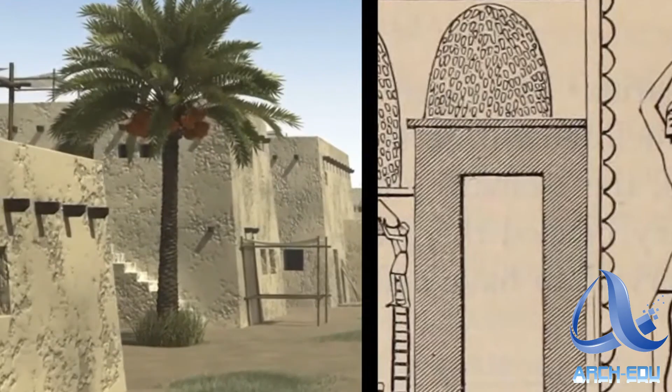The Nile River was the lifeline of ancient Egypt. The civilization rose and fell on its monsoonal tides, which brought rich silts for farming down the river. But this powerful waterway was known to rise too high for the Egyptian people 7,000 years ago. To overcome this, they prepared simple walls from reeds, filled with soil and rocks to shore up a failing bank, nudging the flow of the mighty Nile where it would benefit these ancient people the most.

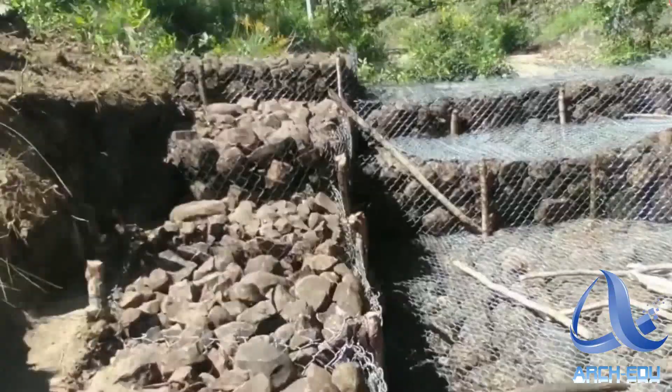The retaining walls date back to ancient Egypt, where they were used to harness the great power of the Nile River. This construction technique used for such walls is called gabion walls. The word comes from the Italian gabbione or big cage, and has its roots in Latin, from the word cavea meaning cage. Gabion blocks are commonly used today when swift construction of earthworks, retaining walls, and even military emplacements are required.

Retaining walls around the world. An ancient community in modern Ireland, Newgrange, Cairn also used retaining walls 5,000 years ago. Also in Old Mesopotamia, evidence shows that they were using retention walls to create pyramid-like structures during those periods.

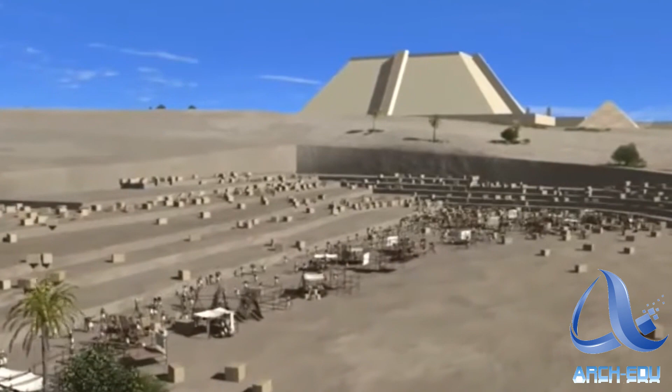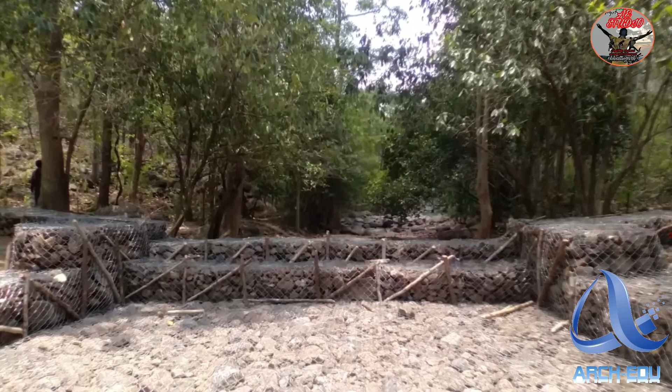The salient factor in making modern steel gabion cages so effective is that they can be collapsed and carried with ease, and once an emplacement is required, they are simply formed into shape and filled with rocks and soil, thus making them an excellent tool for dealing with flash flooding, just as the ancient Egyptians did thousands of years ago. Now let's look at some of the world's greatest retaining walls.

First, Caesar's double walls at the Siege of Alesia were a masterpiece of military engineering. Second, the Berlin Wall. When the Berlin Wall was built in 1961, its construction would physically divide the east and west of the city for the next 28 years. It would become a symbol of the Cold War and heavily influenced German culture for many years to come.

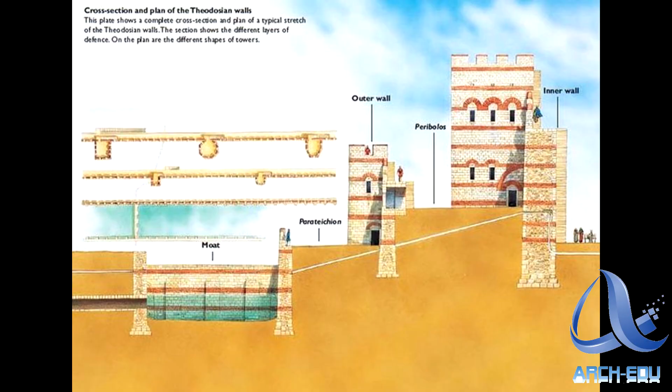Third, the mighty walls of Constantinople. The ancient defensive stone walls of Constantinople, currently known as Istanbul, Turkey, have surrounded and defended the city for over 1,500 years. They were originally built when the city was founded as the new capital of the Roman Empire by Emperor Constantine the Great in 330 AD.

Fourth, the European Wall of China, the Walls of Ston. The Walls of Ston, in Croatia, are some of the longest of any fortress in the world. Construction began in around 1358 and once completed they would stretch for more than 7 kilometers.

Fifth, the Diyarbakir Walls. Built under the reign of Roman Emperor Constantius II in the 3rd-4th century AD, the Diyarbakir fortress is located in Sur, Turkey. The material for the walls came from an older Roman city of Amida and they are the widest and longest defensive walls in the world after the Great Wall of China.

Sixth, Hadrian's Wall. Built to keep tribes of the north out of the Roman province of Britannia, Hadrian's Wall's construction began in 122 AD. The entire fortification ran from the banks of the River Tyne on the North Sea to the Solway Firth on the Irish Sea.

Seventh, the Aurelian Walls. The Aurelian Walls, built between 271 and 275 AD in Rome, superseded the older original 4th century BC Servian Wall. These impressive defensive structures were built to enclose all 7 hills of Rome, Campus Martius, and parts of the Tiber and the Trastevere district.

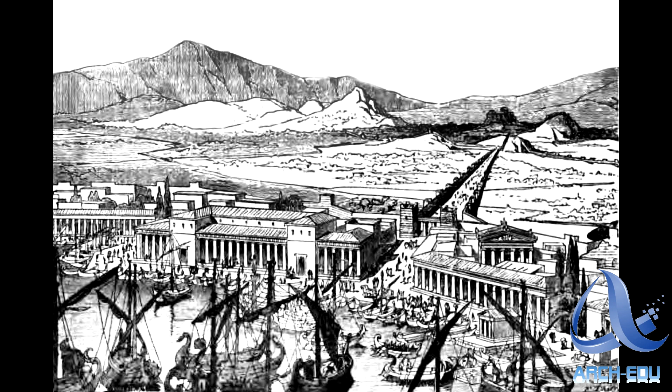Eighth, the Athenian Wall. Stretching over roughly 6 kilometers each, the long walls of Athens protected Athenians' access to their ports of Piraeus and Phalerum during times of siege. They were built over several phases, with the first phase completed in the 5th century BC in response to Xerxes' invasion of 479 BC.

Ninth, the Great Wall of China. One of the medieval wonders of the world, the Great Wall of China runs, roughly, east to west across the historical northern border of China. It officially runs for around 21,196 kilometers or 13,171 miles, with the best preserved and maintained section from the Ming Dynasty extending for just over 8,850 kilometers of that total.

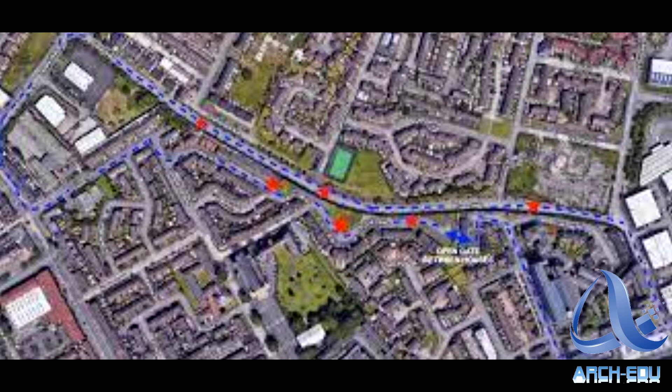Tenth, the Belfast Peace Lines. In an attempt to keep the peace, British officials built a series of separation barriers across Northern Ireland to keep Republican Catholic and Loyalist Unionist Protestant communities apart. The first of these walls was built in 1969, with as many as 59 being built as of 2017.

Eleventh, the Moscow Kremlin Walls. The Moscow Kremlin, simply the Kremlin, is a fortified complex in the heart of the Russian city of Moscow. The original defenses built by Yuri Dolgoruki were destroyed by Mongol Tartar invaders, with the later walls meeting a similar fate in 1365. Stone walls were erected in the 14th century and were later remodeled during the 15th century.

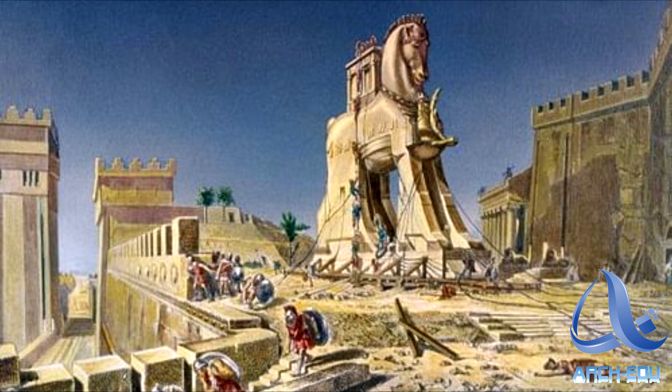Twelfth, the Walls of Troy. The walls surrounded the city and would have been over 5 meters high. The walls were made of limestone and had a series of watchtowers, brick ramparts, or elevated mounds that served as protective barriers. Archaeological evidence suggests the first Trojan walls were erected between 3000 and 2600 BC.

Thirteenth, Fort Kumbhalgarh's walls. Fort Kumbhalgarh is an enormous Mewar fortress situated in the Aravalli Hills in the Rajsamand district of Rajasthan state in western India. It was built during the 15th century by Rana Kumbha, and it was the birthplace of the warrior king of Mewar, Maharana Pratap. The fortress and its walls are built on top of a hill 1,100 meters above sea level. Its frontal walls are as much as 4.5 meters thick with 7 fortified gateways.

14. The Korean Border DMZ. The Korean Demilitarized Zone, DMZ, is a border barrier that divides North from South Korea along the 38th parallel. It was constructed after an agreement between North Korea, China, and the UN in 1953. The barrier stretches for 250 kilometers and is, on average, 4 kilometers wide along the DMZ.

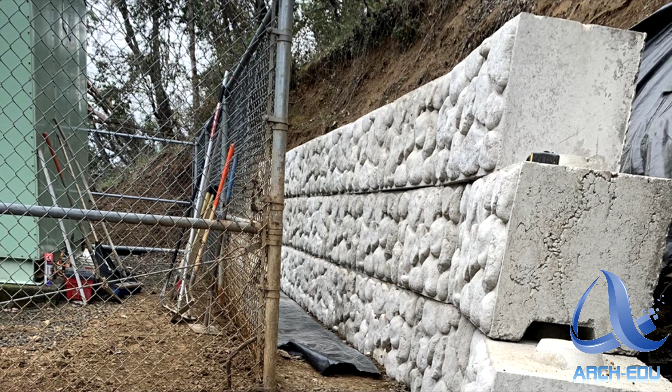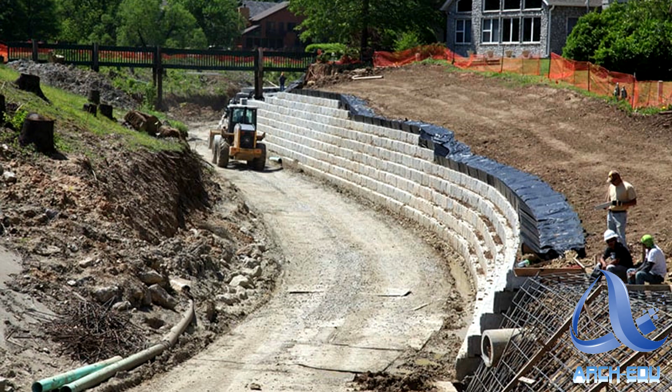Let's take a look at the types of retaining walls. Gravity retaining walls. Gravity retaining wall depends on its own weight only to resist lateral earth pressure. Generally, gravity retaining wall is massive because it requires significant gravity load to counteract horizontal soil pressure. While designing gravity retaining wall, sliding, overturning, and bearing forces shall be taken into consideration. It can be constructed from different materials such as stone, concrete, and masonry units. Crib retaining wall and gabion retaining wall are types of gravity retaining walls, being used more frequently nowadays.

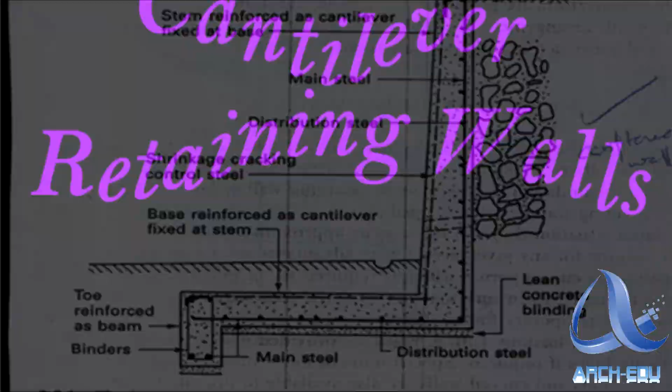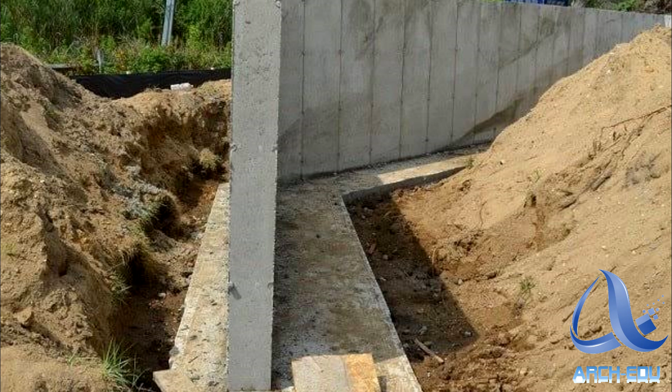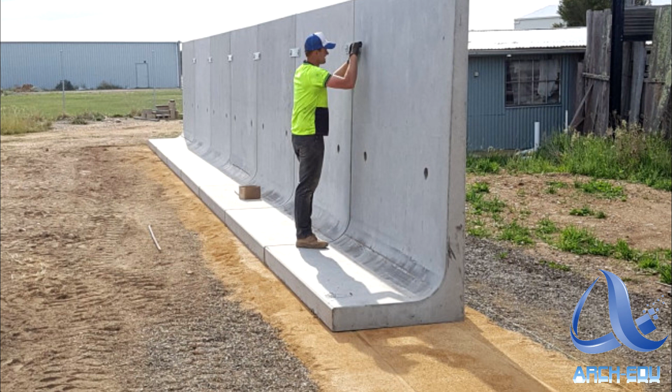Cantilever retaining walls. Cantilever retaining walls are constructed of reinforced concrete. Cantilever retaining wall consists of a relatively thin stem and a base slab. The base is divided into two parts, namely the heel and toe. The heel is the part of the base under the backfill and the toe is the other part of the base. It uses much less concrete than monolithic gravity walls, but requires more design and careful construction. It can be formed on site or precast in a factory.

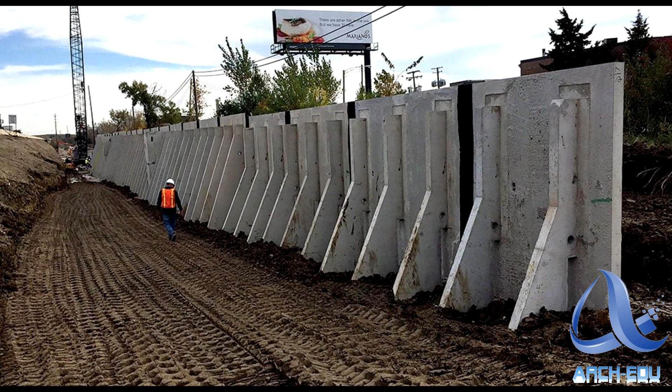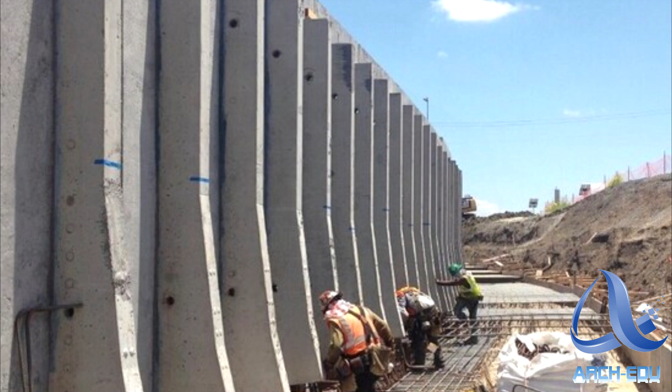Counterfort retaining walls. Counterfort retaining walls are same as cantilever walls, except they have thin vertical concrete webs at regular intervals along the backside of the wall, and these webs are known as counterforts. The counterforts tie the slab and base together, and the purpose of them is to reduce the bending moments and shear forces imposed on the wall by the soil. The secondary effect of these webs is to increase the weight of the wall from the added concrete. It can be precast or formed on site.

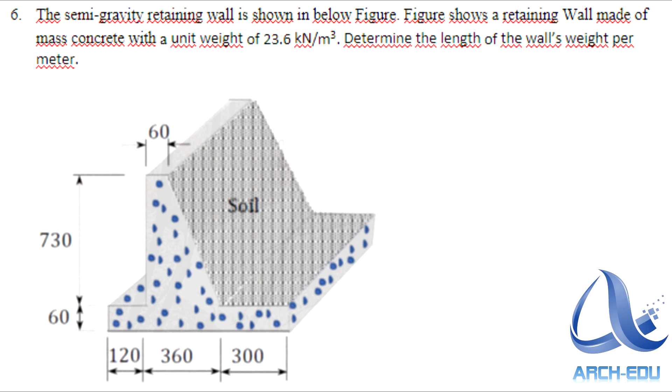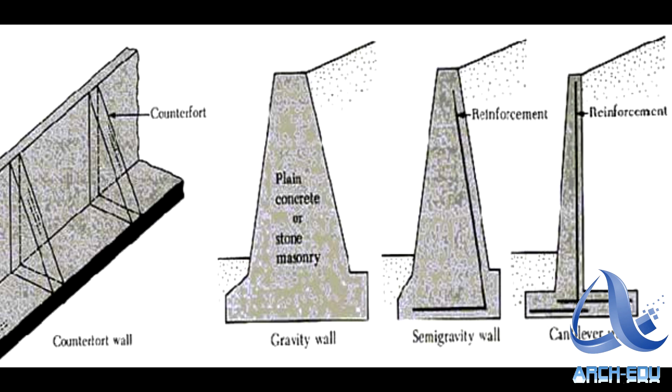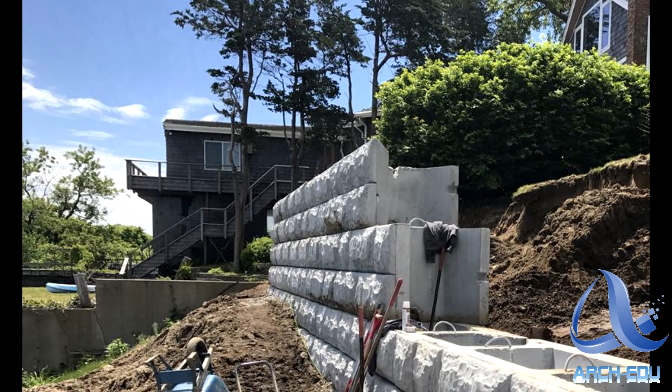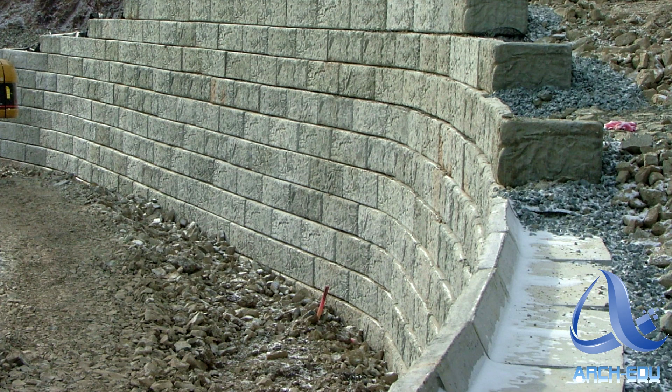Semi-gravity retaining walls. Semi-gravity retaining walls are the specialized form of gravity walls. These types of retaining walls have some tension reinforcing steel included so as to minimize the thickness of the wall without requiring extensive reinforcement. They are a blend of the cantilever wall and gravity wall designs. These walls are often constructed of reinforced concrete, unreinforced concrete, or stone masonry. The rigid gravity walls develop their soil retaining capacity from their dead weights. The semi-gravity walls, such as cast-in-place concrete cantilever walls, develop resistance to overturning and sliding from self-weight and weight of soil above the wall footing.

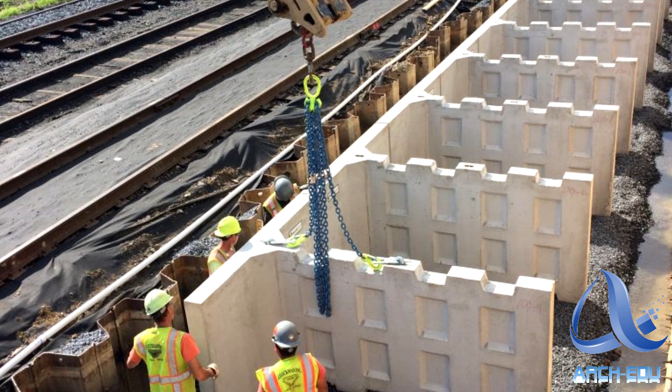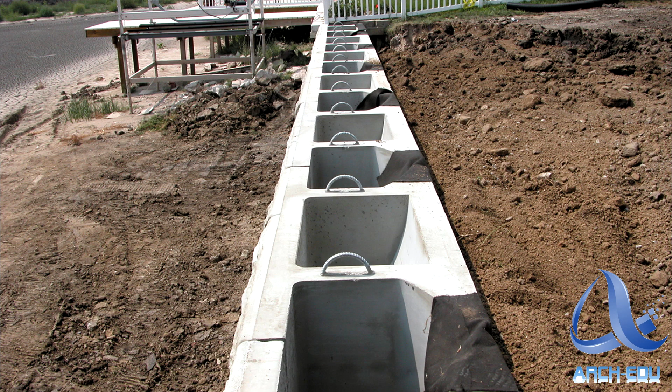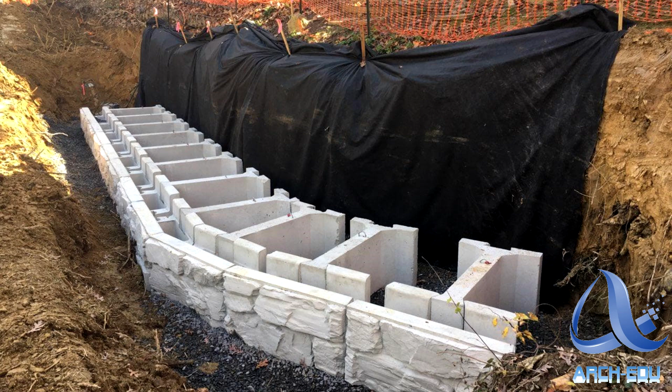Prefabricated modular gravity walls. These walls include crib walls, bin walls, and gabion walls. A crib wall, concrete or timber, is a gravity-retaining structure that consists of interlocking concrete or timber elements. Each crib unit is filled with compacted granular soil. A bin wall, concrete or metal, is constructed of adjoining closed-face or open-face bins. Each bin unit is filled with compacted granular soil. Gabion walls consist of baskets made of galvanized steel mesh or PVC-coated wire mesh. The baskets are filled with durable rock ranging in size from 4 to 8 inches.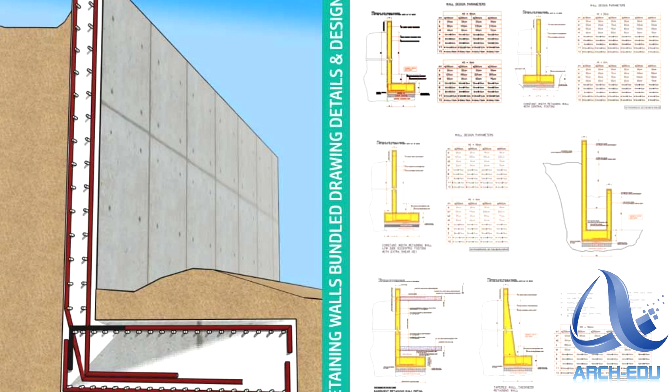Non-gravity cantilevered walls. These types of retaining walls develop lateral resistance through the embedment of vertical wall elements and support retained soil with wall-facing elements. Vertical wall elements are normally extended deep in the ground to provide lateral and vertical support. The vertical wall elements can be piles, drilled shafts, steel sheet piles, etc. Wall faces can be reinforced concrete, metal, or timber.

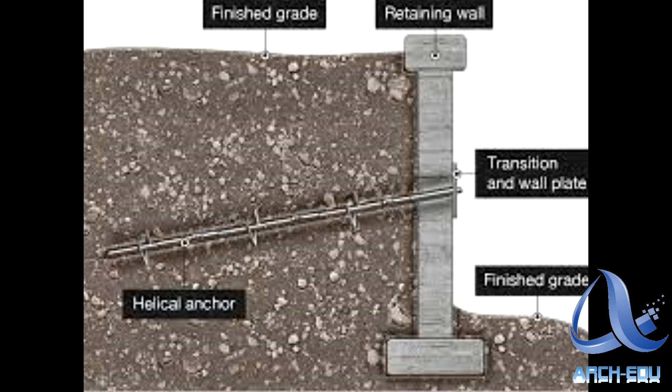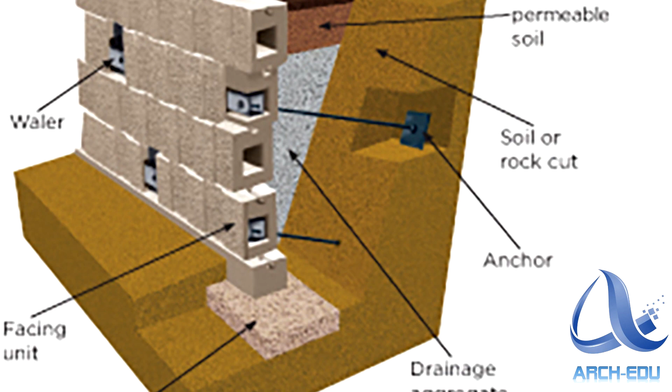Anchored walls. For the construction of high retaining walls, deep cable rods or wires are driven deep sideways into the earth, then the ends are filled with concrete to provide an anchor. These are also known as tiebacks. These types of retaining walls typically consist of the same elements as the non-gravity cantilevered walls but derive additional lateral resistance from one or more tiers of anchors. The anchored walls are typically used in the cut situation, in which the construction proceeds from the top to the base of the wall.

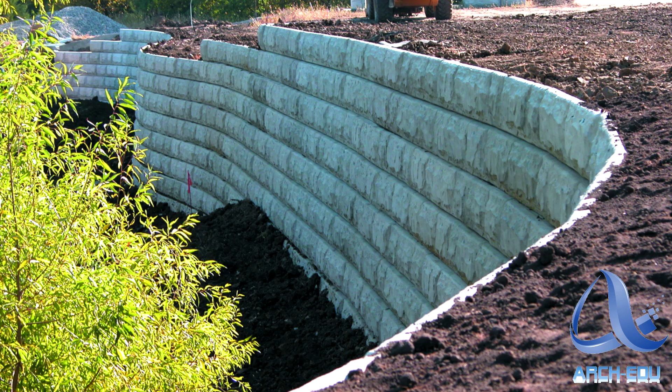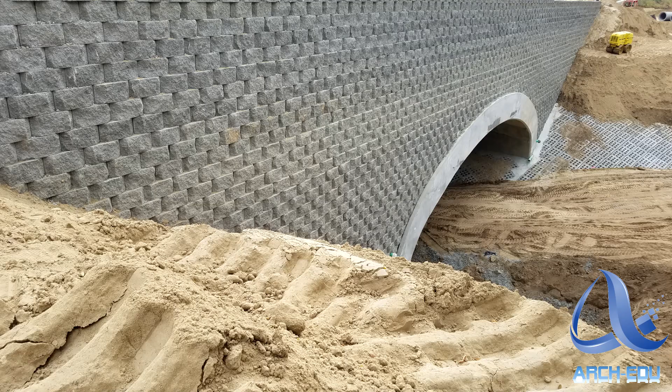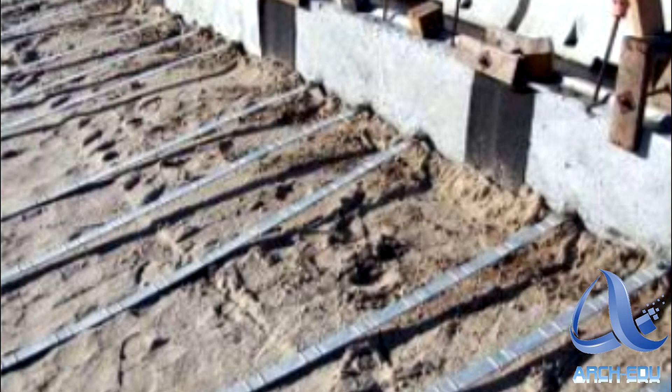Mechanically stabilized earth walls, known as MSE walls. These types of retaining walls normally include a facing element and a reinforcement element embedded in the backfill behind the facing. The facing element can be concrete, segmental block, or panel, or steel wire mesh. The reinforcement element can be either synthetic, geotextile, geogrid, or metallic strip, grid, or wire mesh. These types of retaining walls are often used to support fills and when substantial total and differential settlement are anticipated. Most of the MSE walls are proprietary, and a list of pre-approved MSE walls for use can be obtained from the geotechnical engineer.

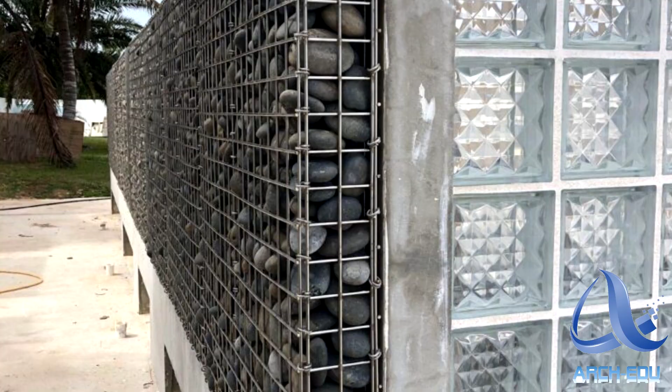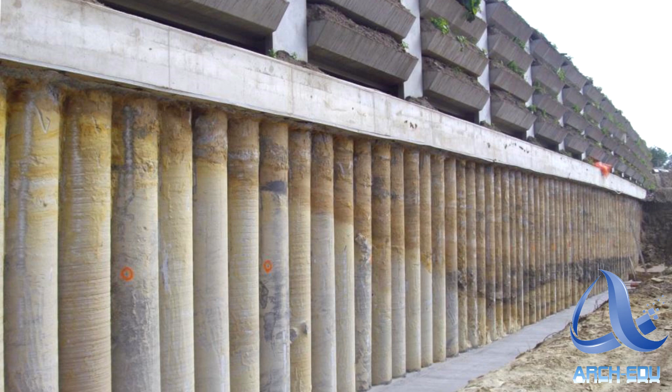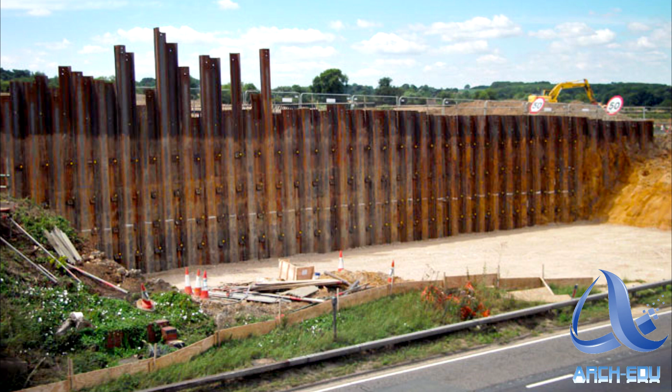Hybrid systems. Retaining walls that use both mass and reinforcement for stability are termed as composite retaining wall or hybrid systems. Piled retaining wall. Pile retaining walls are constructed by driving reinforced concrete piles near to each other. Piles are forced into a depth that is satisfactory to counter the force which tries to push over the wall. It is employed in both permanent and temporary works. These types of retaining walls give high stiffness retaining components which are capable to hold lateral pressure in large excavation depths with nearly no disturbance to surrounding structures or properties.

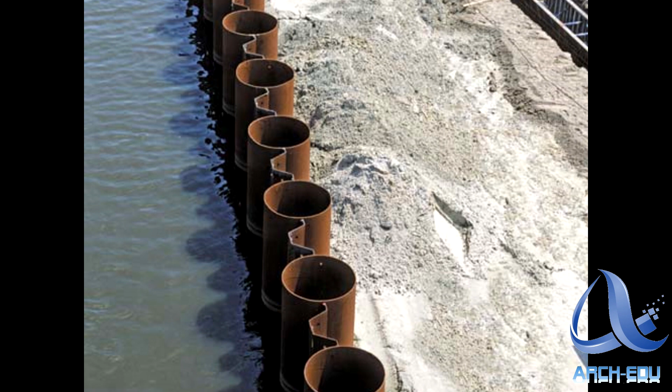Sheet pile walls are built using steel sheets into a slope or excavations up to a required depth, but it cannot resist very high pressure. Sheet pile retaining walls are economical up to height 6 meters. So folks, that's all. This video talks only about types of retaining walls.